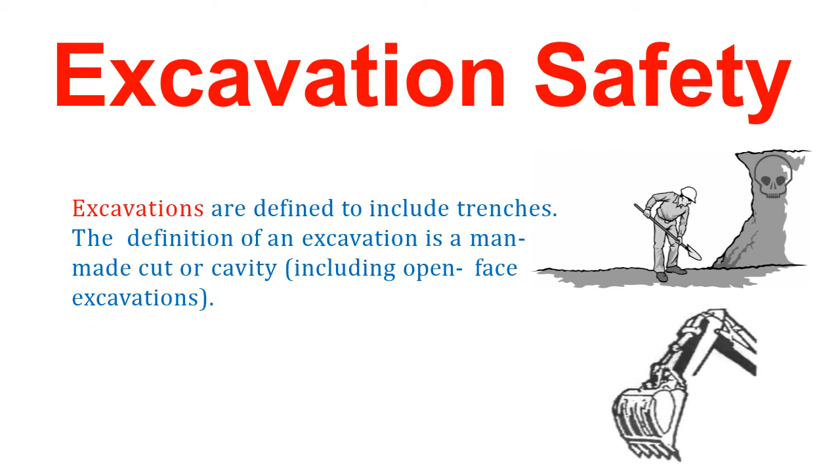Competent persons. Competent persons mean one who is capable of identifying existing and predictable hazards in the surroundings or working conditions which are unsanitary, hazardous, or dangerous to employees, and who has authorization to take the prompt corrective measures to eliminate them.

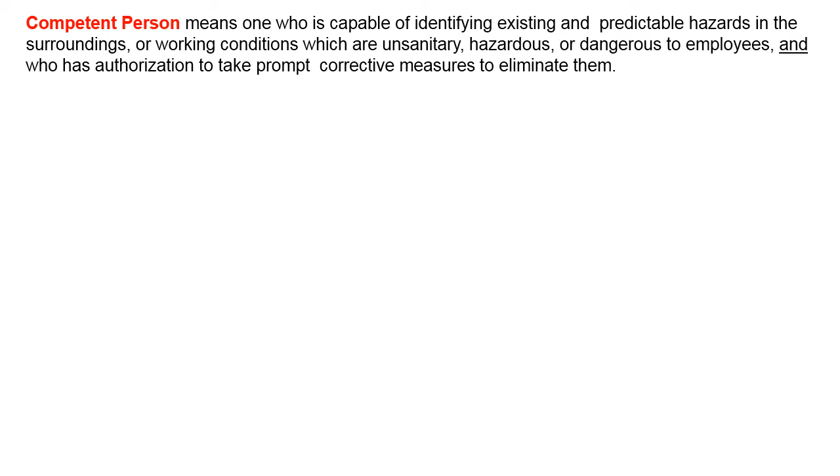Protective system means a method of protecting employees from cave-ins, from material that could fall or roll from an excavation face or into the excavation, or from the collapse of adjacent structures. Protective systems include the support system, sloping, benching system, shield system, and other systems that provide the necessary protection.

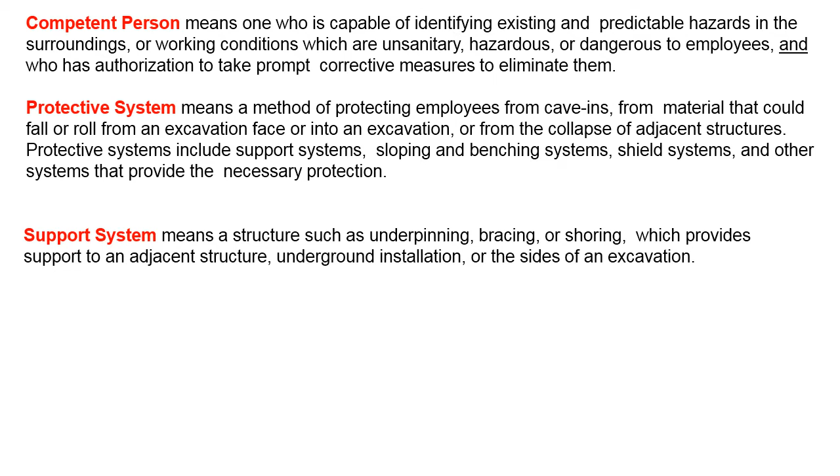Support system means a structure such as underpinning, bracing, or shoring which provides support to an adjacent structure, underground installation, or the sides of an excavation.

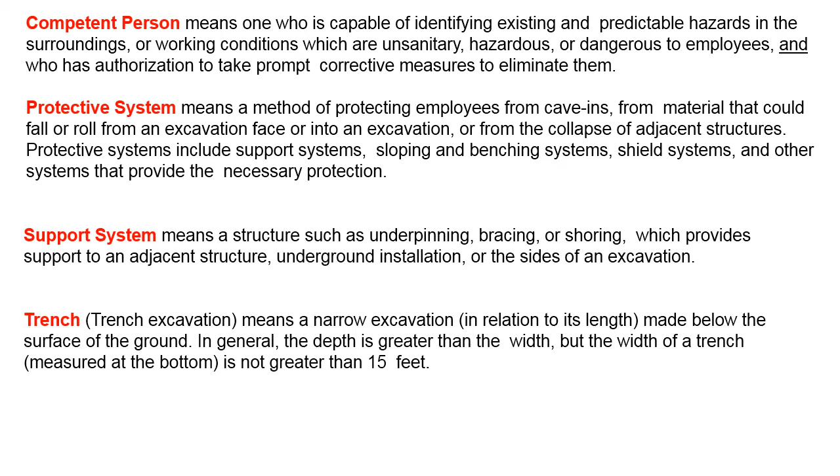Trench. Trench excavation means a narrow excavation in relation to its length made below the surface of the ground. In general, the depth is greater than the width, but the width of the trench measured at the bottom is not greater than 15 feet.

Excavation work is one of the most hazardous types of work done in the construction industry. Injuries from excavation work tend to be of a very serious nature and often result in fatalities. The concern in excavation related activities is a cave-in. Cave-ins are much more likely to be fatal to the employees involved than other construction related accidents. Furthermore, a high rate of injuries has continued to occur in and around excavations.

Although the concern in excavation related work is cave-ins, in this video we will also cover other dangers many do not often think of, including hazardous atmospheres, underground utilities, and vehicle/mobile equipment exposure.

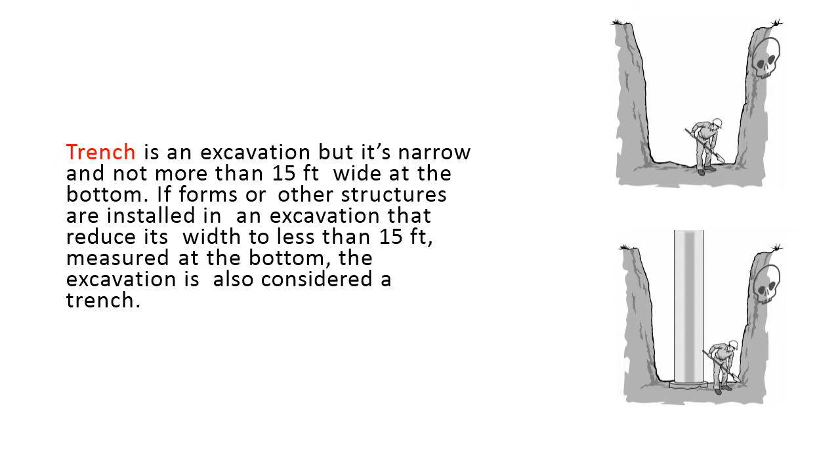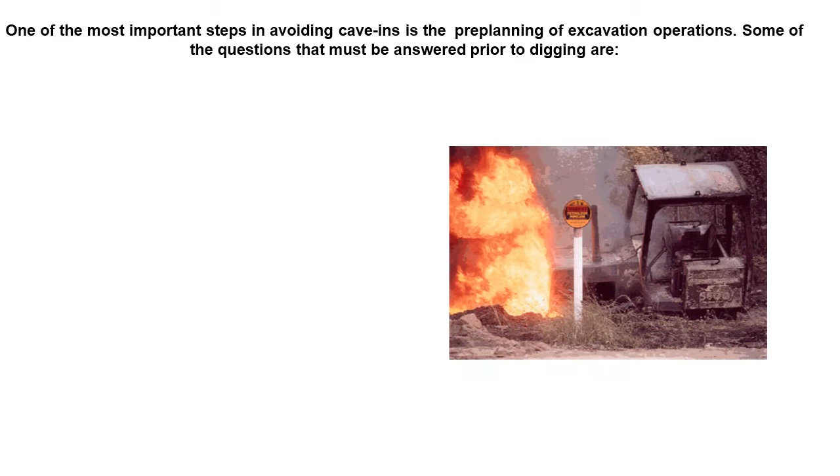One of the most important steps in avoiding cave-ins is the pre-planning of excavation operations. Some of the questions that must be answered prior to digging are: what types of soil will be found? What are the soil moisture conditions? Has the soil previously been disturbed? How large will the excavation be? How long will the excavation be open? What kinds of weather can we expect?

What kinds of equipment will be on the job? Will the excavation be near structures? Is traffic control needed near excavations? What source of vibration will be nearby? Will water be a problem? What kind of shoring, and how much?

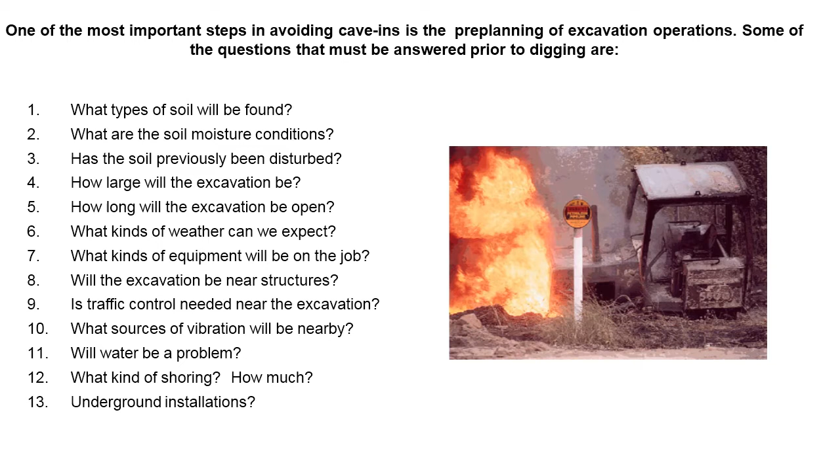Underground installations, if there are any underground installations, assess underground installations.

The picture is shown as an example. Determine the estimated location, contact the utility or owner, proceed cautiously, find the exact location, support, protect, or appropriately remove the installation in open excavations.

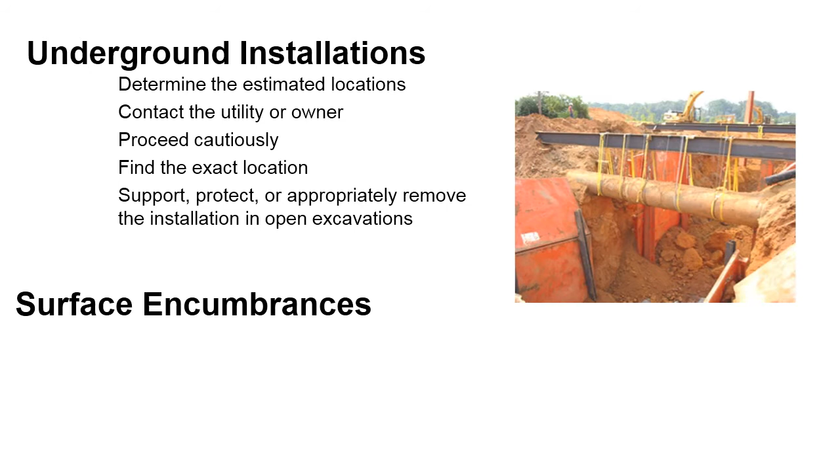Surface encumbrances: remove or support if creating a hazard to worker. What are some examples of surface encumbrances? Poles, rocks, trees. Next is access and egress.

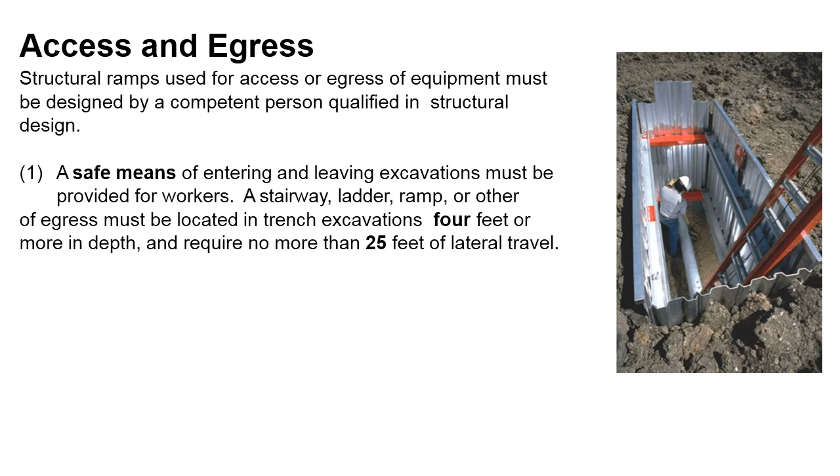Structural ramps used for access or egress of equipment must be designed by a competent person qualified in structural design. A safe means of entering and leaving excavation must be provided for workers. A stairway, ladder, ramp, or other means of egress must be located in trench excavations 4 feet or more in depth and require no more than 25 feet of lateral travel.

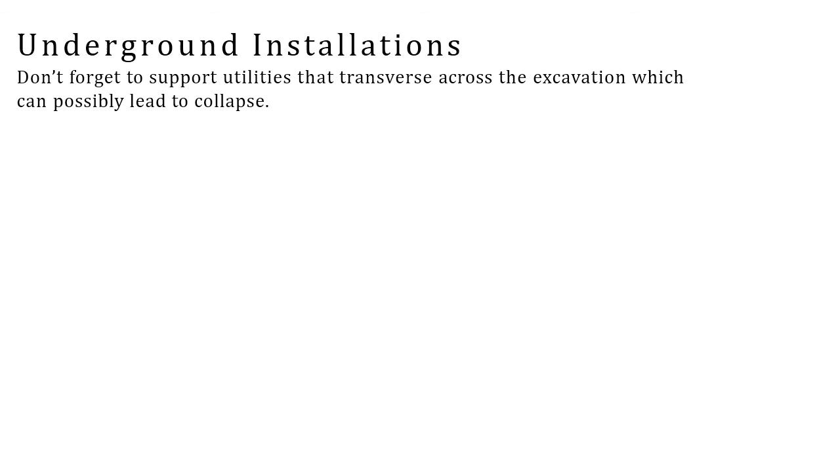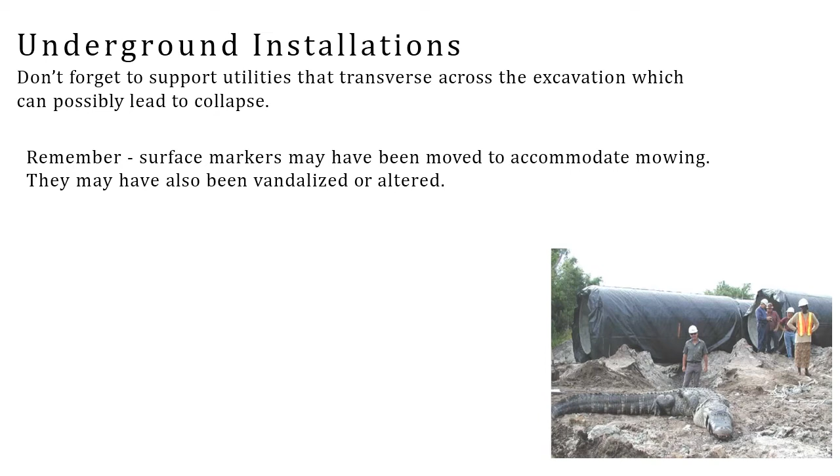Underground installations. Don't forget to support utilities that traverse across the excavations, which can possibly lead to collapse. Remember, surface markers may have been moved to accommodate mowing. They may have also been vandalized or altered.

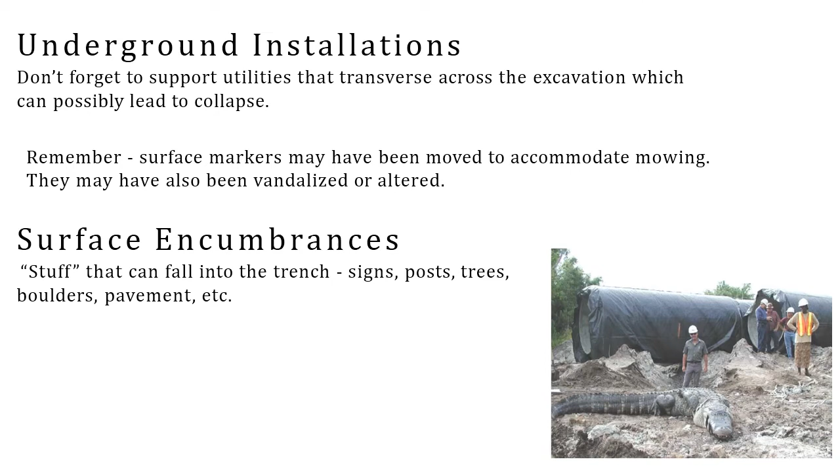Surface encumbrances: stuff that can fall into the trench, signs, posts, trees, boulders, pavements.

Access and egress. In addition to the 4-foot depth and 25 feet lateral requirements, don't forget safe means, for example ladders, stairways, etc., in good condition. No improper extension ladders, stable, no impalement hazards.

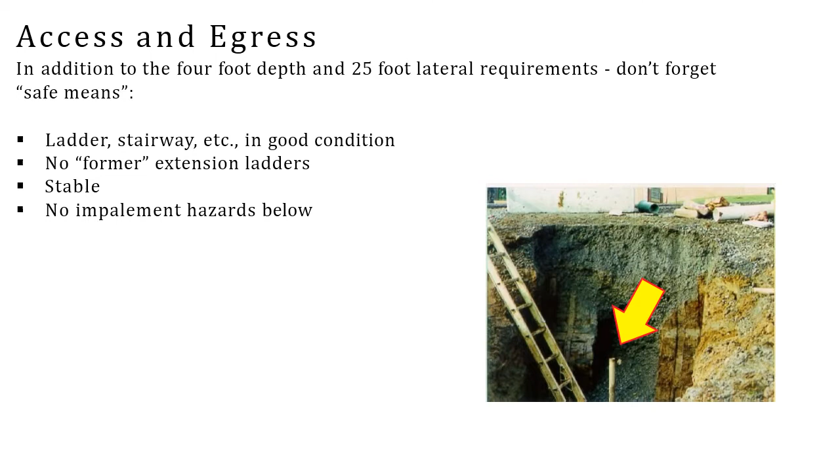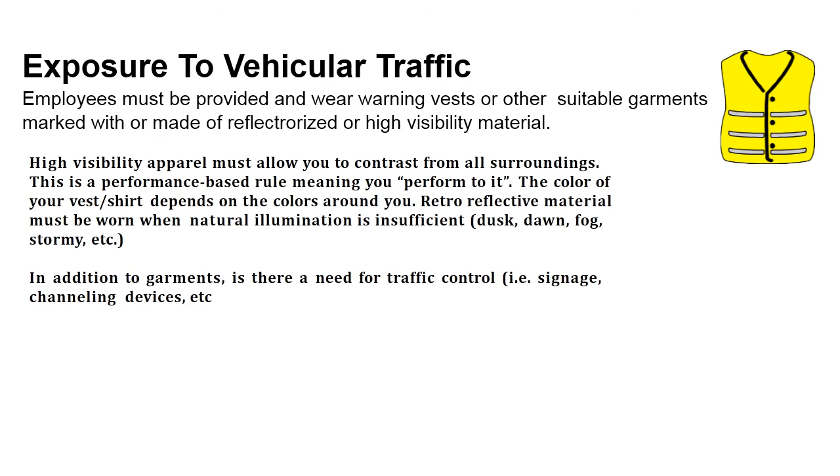In addition to the garments, is there a need for traffic control? For example, signage, channeling devices, etc.

Exposure to falling loads: employees are not allowed under loads handled by lifting or digging equipment. Workers must either stand away or otherwise be protected from any vehicle being loaded or unloaded to avoid spilling or falling materials.

Warning system for mobile equipment: a warning system must be utilized when mobile equipment is operated adjacent to an excavation or when such equipment is required to approach the edge of an excavation and the operator does not have a clear and direct view of the edge. Barricades, hand or mechanical signals, or stop logs can be used.

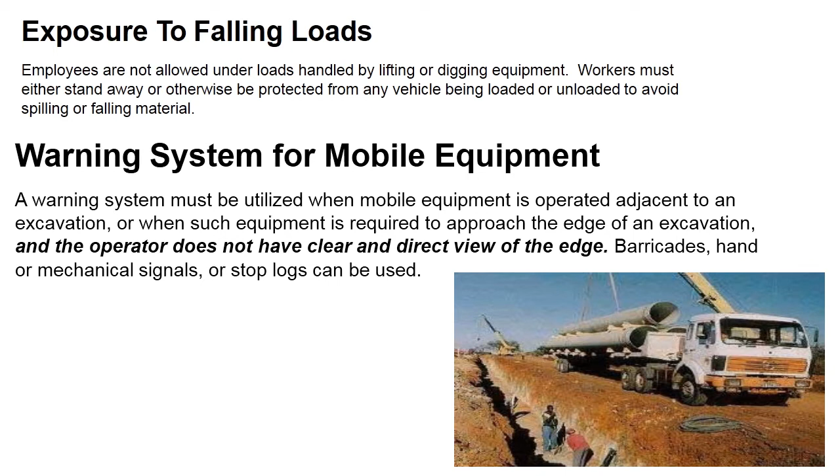Next is hazardous atmospheres. Purpose: prevent exposure to harmful levels of air contaminants such as oxygen deficiency, explosives, flammables, toxins, and to assure acceptable atmospheric conditions through atmospheric testing, removal of substance, proper ventilation, respiratory protection, etc.

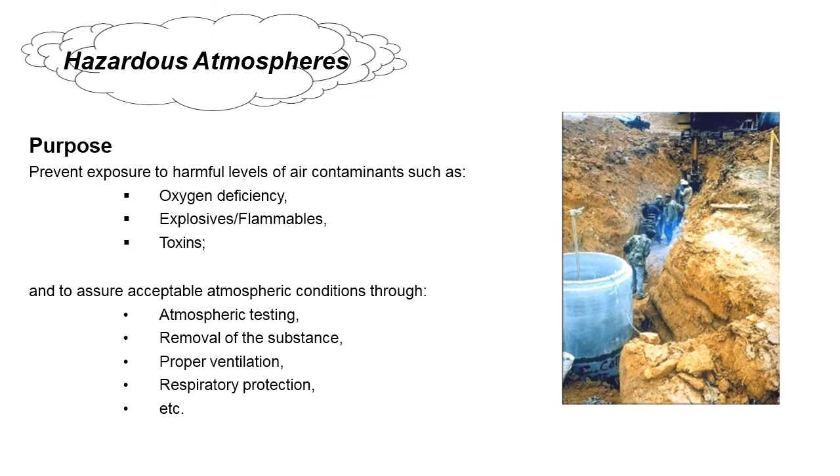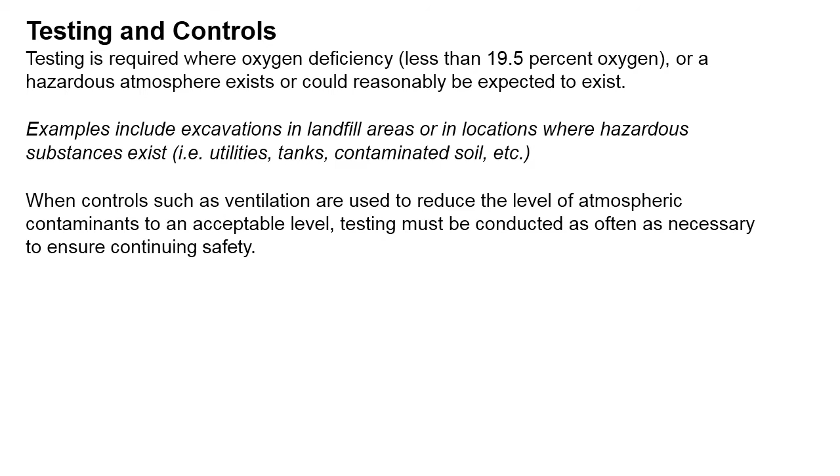Testing and controls: testing is required where oxygen deficiency less than 19.5% or hazardous atmosphere exists or could reasonably be expected to exist. Examples include excavation in landfill areas or in locations where hazardous substances exist, that is utilities, tanks, contaminated soil, etc. When controls such as ventilation are used to reduce the level of atmospheric contaminants to an acceptable level, testing must be conducted as often as necessary to ensure continuing safety.

Emergency rescue equipment must be readily available where hazardous atmosphere conditions exist or can reasonably be expected to develop. Note: Division 3, Subdivisions D and E provide additional requirements. Additionally, workers entering a bell-bottom pier or other similar deep and confined footing excavation must utilize a harness and lifeline system.

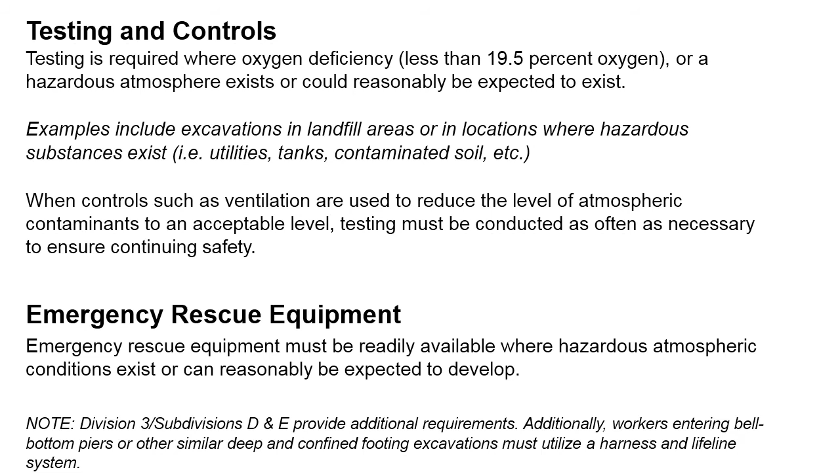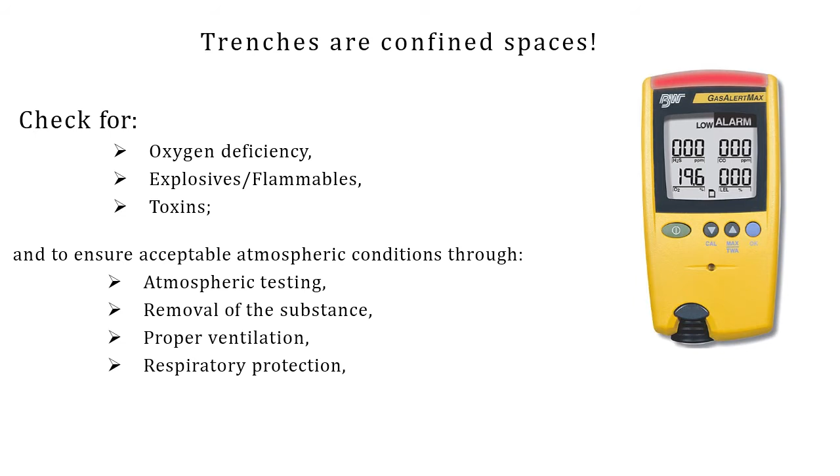Trenches are confined spaces: check for oxygen deficiency, explosives, flammables, toxins, and ensure acceptable atmospheric condition through atmospheric testing, removal of the substance, proper ventilation, respiratory protection.

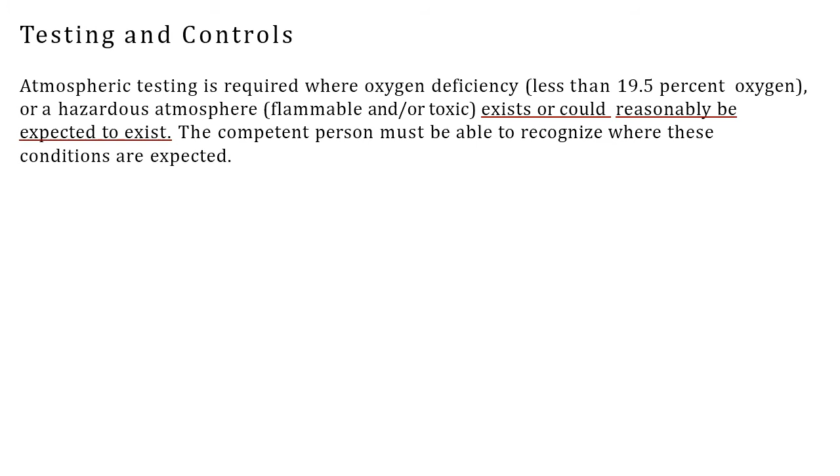Testing and controls: atmospheric testing is required where oxygen deficiency less than 19.5% or hazardous atmosphere, flammable or toxic, exists or could reasonably be expected to exist. The competent person must be able to recognize where these conditions are expected.

Some gases are heavier than air and can accumulate at the bottom of the trench. For example, hydrogen sulfide, carbon dioxide, and vapors from fuels are heavier than air. Other gases like methane and carbon monoxide are lighter than air. This is important to know when sampling.

There may also be oxygen deficient situations where purging with an inert gas has occurred, for example, decommissioned gas lines. Remember, sources may come from outside the trench and creep in, or come from inside the trench, that is, gas lines, contaminated soil, gas-powered tool equipment.

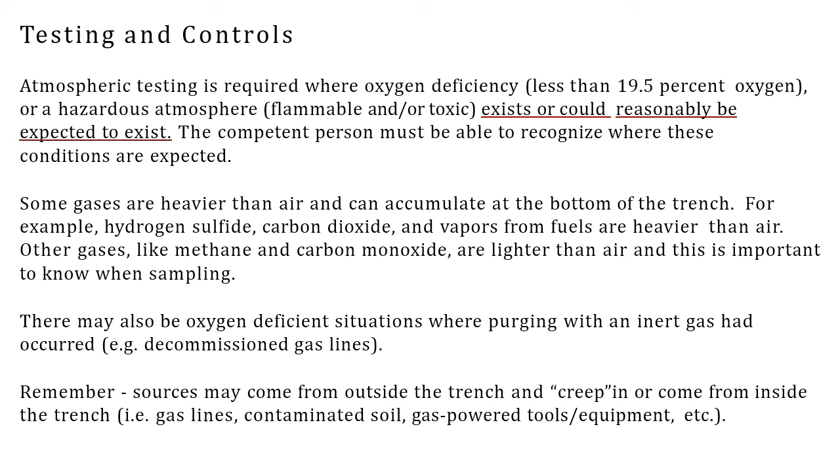Water accumulation: employees must be properly protected when working in excavations where water has accumulated or is accumulating. Precautions will vary with each situation but may include diversions, dewatering systems, special supporting systems, or water removal equipment. The competent person must monitor water removal equipment.

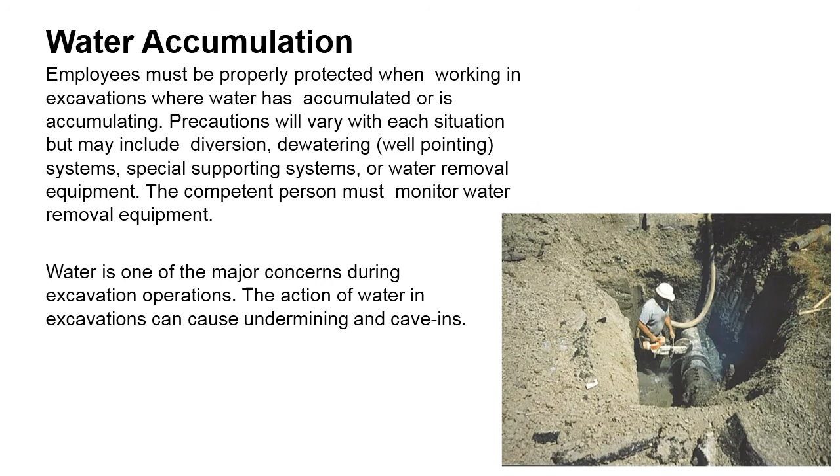Water is one of the major concerns during excavation operations. The action of water in excavations can cause undermining and cave-ins. Water accumulation is one of the major concerns during excavation operations. Water simply allows dirt to move much easier and quicker than it would normally. Think of digging in the sand on a beach.

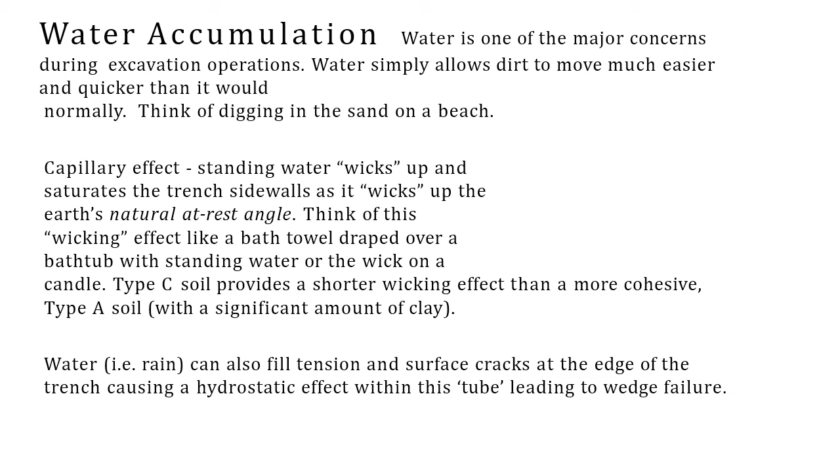Capillary effect: standing water wicks up and saturates the trench side walls as it wicks up the earth's natural at-rest angle. Think of this wicking effect like a bath towel draped over a bathtub with standing water, or the wick on a candle. Type C soil provides a shorter wicking effect than more cohesive type A soil with significant amounts of clay. We will show you examples of type C and type A soils.

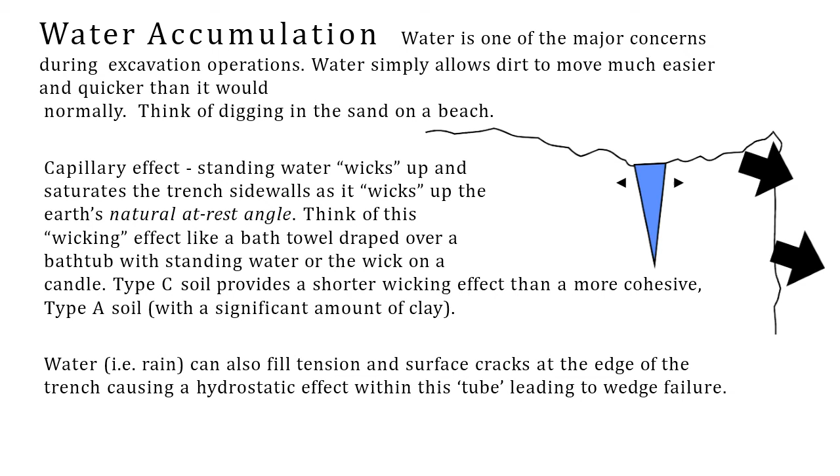Water, that is rain, can also fill tension and surface cracks at the edge of the trench, causing a hydrostatic effect within this tube, leading to wedge failure.

Where the stability of adjacent buildings, walls, or other structures is endangered by excavation operations, support systems such as shoring, bracing, or underpinning must be provided to ensure stability. Excavation below the level of the base or footing that could pose a hazard is not permitted, except when the excavation is in stable rock, or a support system is provided, or a registered professional engineer approves.

Sidewalks, pavements, and appurtenant structures must not be undermined unless a support system or another method of protection is provided to protect employees.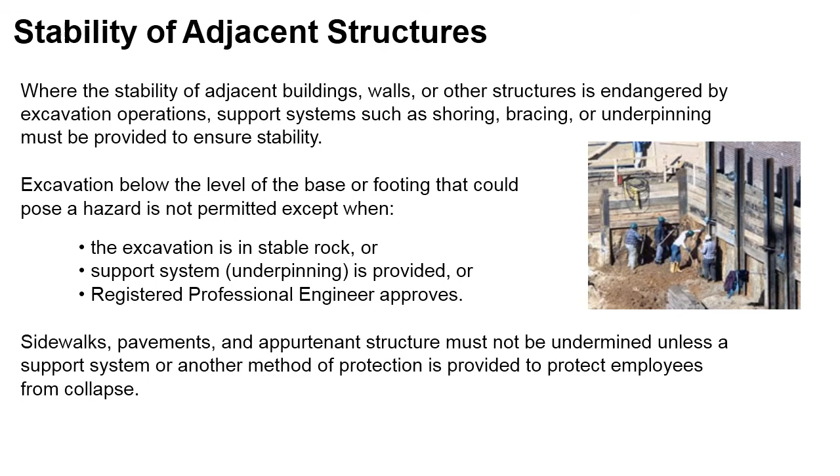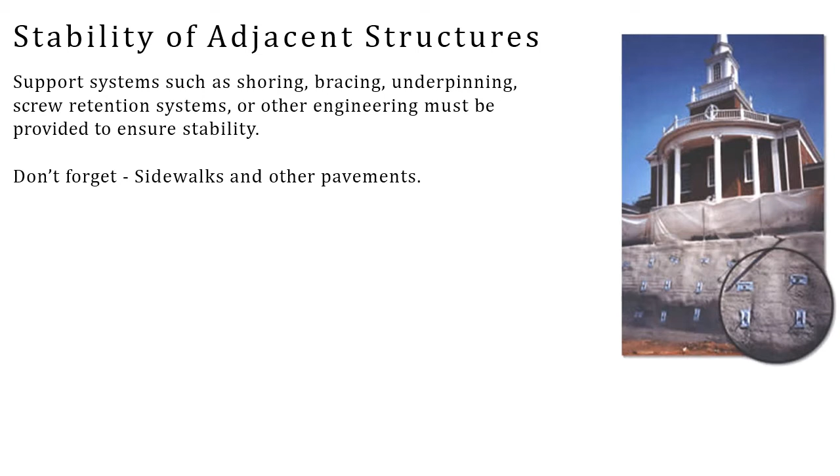Stability of adjacent structures: support systems such as shoring, bracing, underpinnings, retention systems, or other engineering must be provided to ensure stability. Don't forget sidewalks and other pavements.

Daily inspections of excavations, adjacent areas, and protective systems must be made by competent persons for evidence of a situation that could result in possible cave-ins, failure of protective systems, hazardous atmospheres, or other hazardous conditions.

What are we inspecting? If evidence of a possible cave-in, failure in the protective system, hazardous atmosphere, or other significant concerns are found, all affected workers must be removed from hazardous exposure until the area is rendered safe.

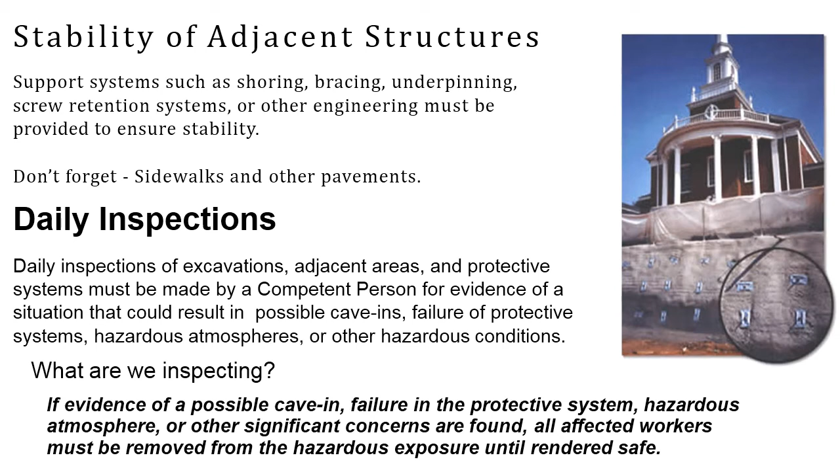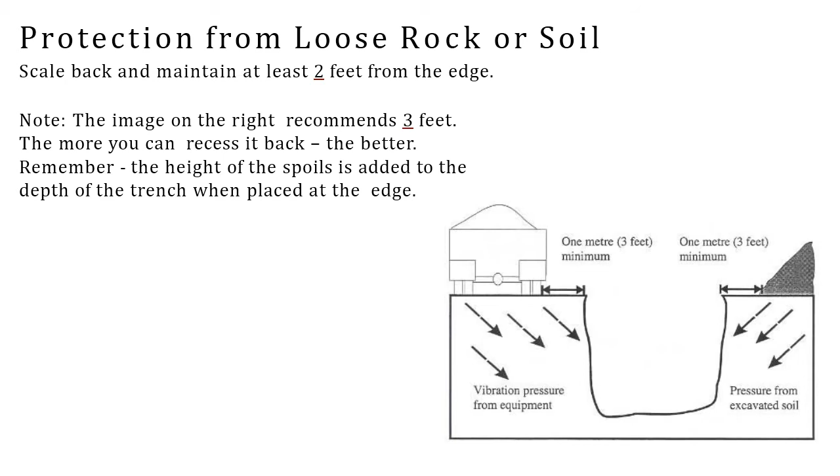Protection from loose rock or soil: scale back and maintain at least 2 feet from the edge. Note the image on the right recommends 3 feet. The more you can recess it back, the better. Remember, the height of the spoils is added to the depth of the trench when placed at the edge, as shown in the picture.

Protection from loose rocks or soil: scale back to remove loose materials or install protective barricades, and place all material and equipment at least 2 feet from the edge.

Fall protection: walkways must be provided when employees or equipment are permitted to cross excavations. Adequate barriers and physical protection must be provided at all remotely located excavations. All wells, pits, shafts, etc. must be barricaded or covered, and backfilled as soon as possible.

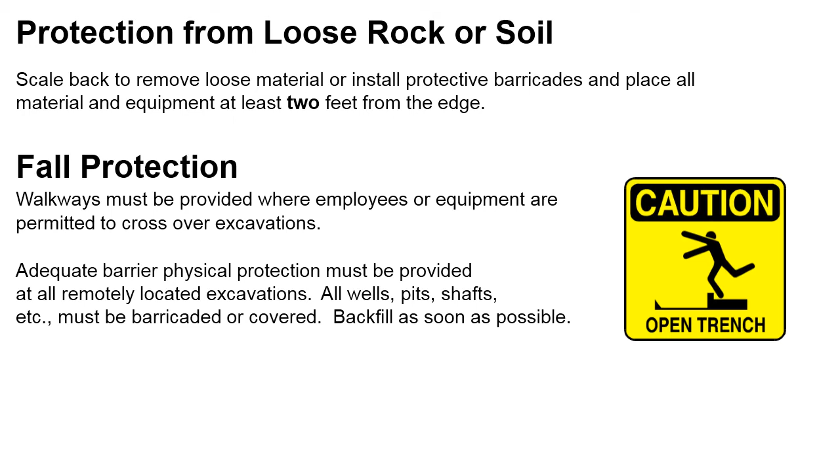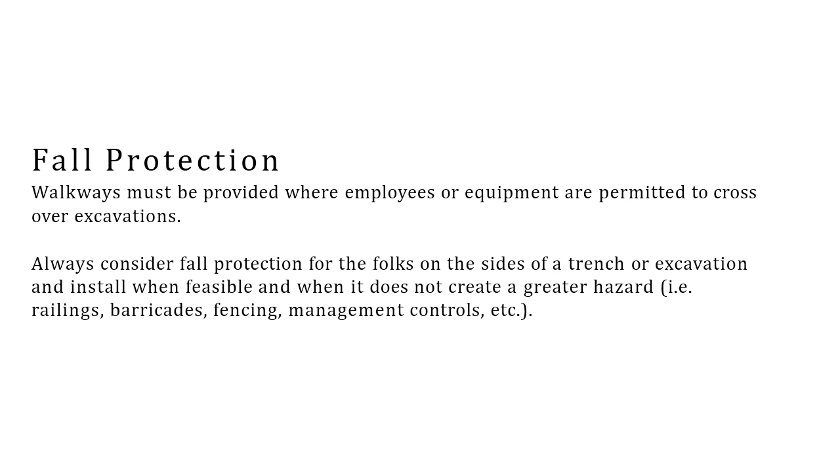Fall protection: walkways must be provided where employees or equipment are permitted to cross excavations. Always consider fall protection for folks on the side of the trench or excavation, and install it when feasible and when it does not create a greater hazard, such as railing, barricades, fencing, or management control.

Protective systems: employees in excavations must be protected from cave-ins by an adequate protective system, except when excavations are made entirely in stable rock or excavations are less than 5 feet deep and a competent person determines there is no indication of potential cave-in. The protective system must have the capacity to resist all loads without failure.

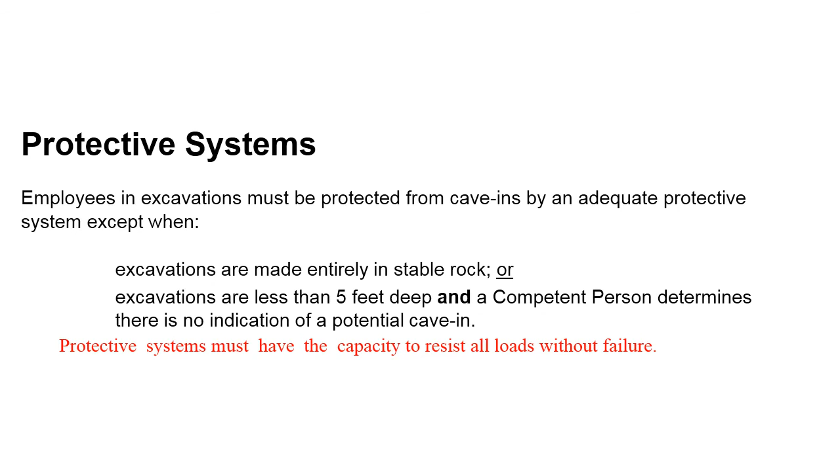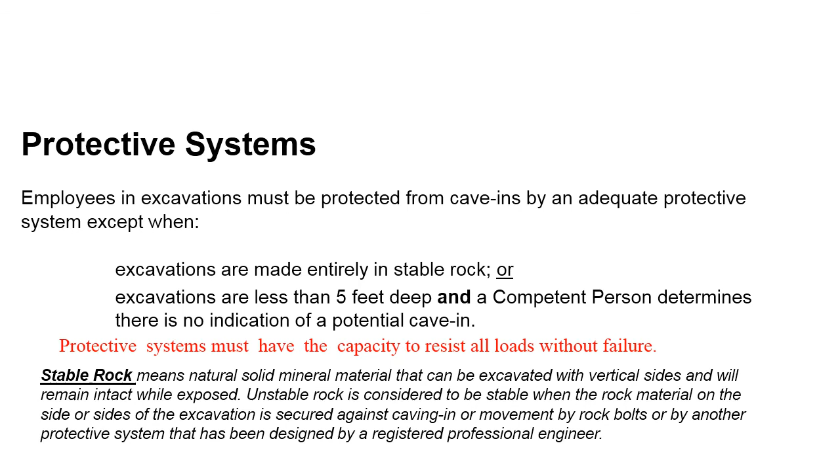Stable rock means natural solid mineral material that can be excavated with vertical sides and will remain intact while exposed. Unstable rock is considered stable when rock material on the sides of the excavation is secured against cave-in or movement by rock bolts or by another protective system designed by a registered professional engineer.

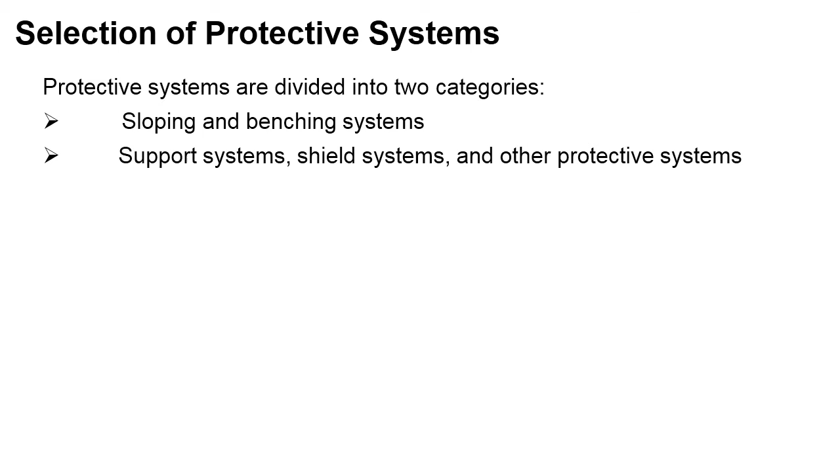Selection of protective system: protective systems are divided into two categories - sloping and benching systems, and support systems, shield systems, and other protective systems. The use of either category requires the choice of one of four design options.

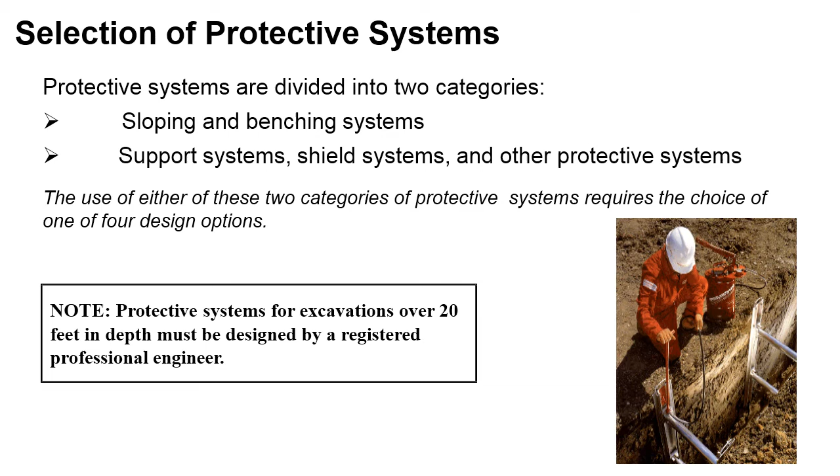Note: protective systems for excavations over 20 feet in depth must be designed by a professional engineer. Excavations and trenches less than 5 feet deep must still be sloped, benched, or otherwise supported when a competent person determines there is an indication of cave-in.

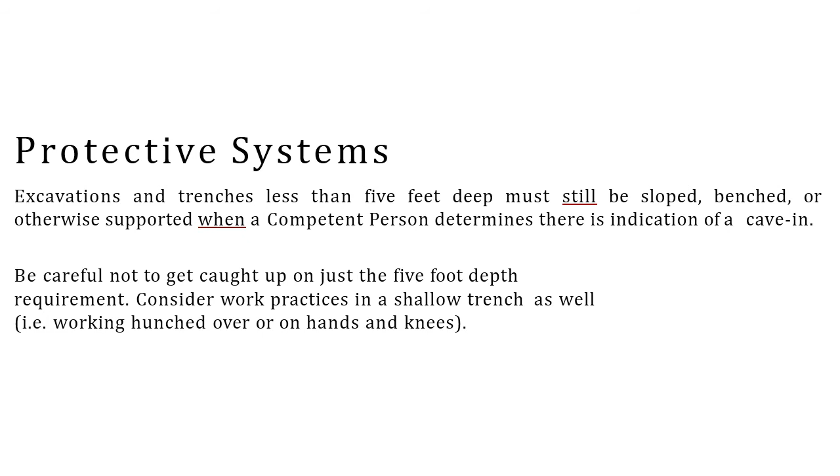Selection of protective system: protective systems are divided into two categories, each including four choices. One: sloping and benching systems. Second: everything else. The basic systems for protecting employees from cave-ins are sloping, benching, shoring, and shielding.

The system you should use depends on factors such as soil type and water content, excavation depth and width, the nature of the work, and nearby activities that could increase the risk of cave-in. The competent person is responsible for considering these factors and determining the appropriate protective system. A registered professional engineer must design protective systems for all excavations more than 20 feet deep.

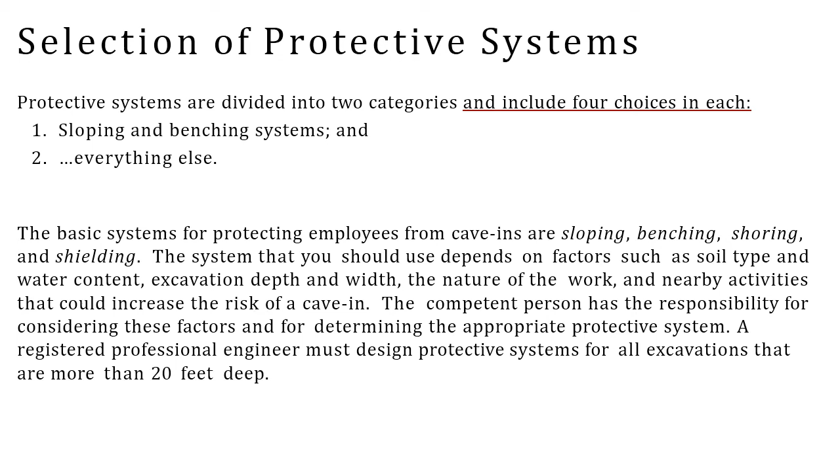Requirements for protective systems - sloping and benching options: the four options include sloped at no steeper than 1 1/2 to 1 ratio, or 34 degrees; maximum allowable slopes and configurations; and designs using tabulated data or designed by a registered professional engineer.

We have a few options here. Option number 1 allows excavation sloped at an angle no steeper than 1 1/2 to 1 ratio, or 34 degrees. This sloping option must be in accordance with the configurations shown for Type C soil in sloping and benching.

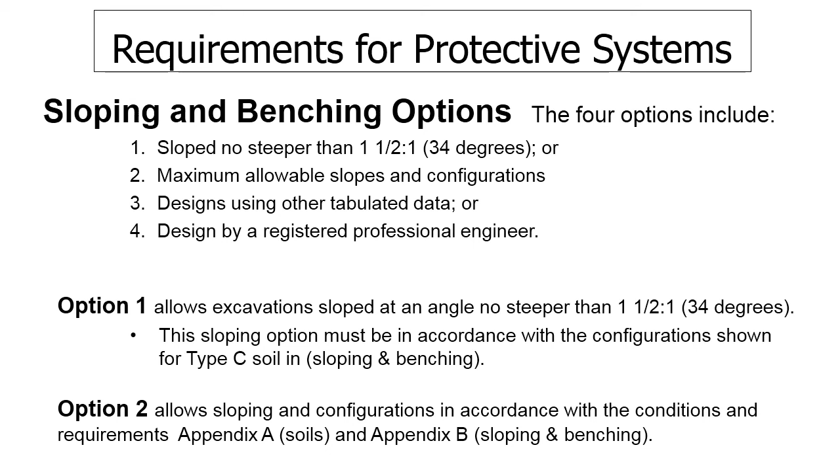Option 2 allows sloping and configurations in accordance with the conditions and requirements of Appendix A soil and Appendix B sloping and benching. We have different types of soils and maximum allowable slopes for excavation - this is just for reference.

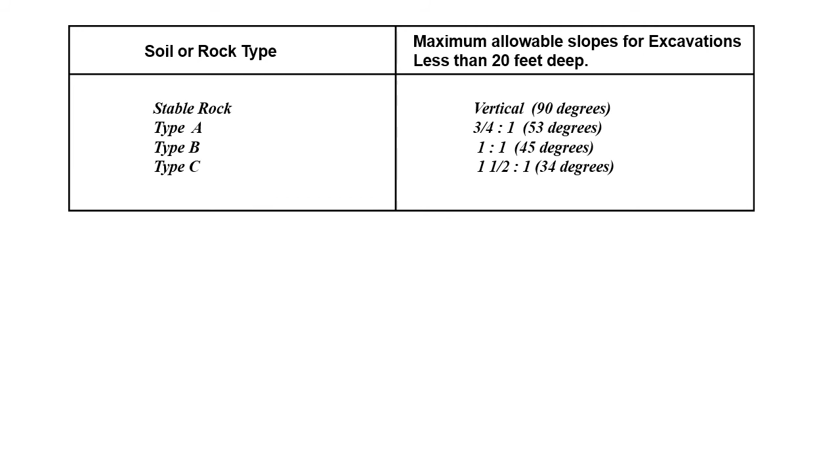Option number 3 allows designs of sloping and benching systems from tabulated data, which must identify the parameters affecting the selection of the slope or bench system, limitations, and any other necessary explanatory information to aid the user in selecting correctly. This must be kept on the job site during construction of the system.

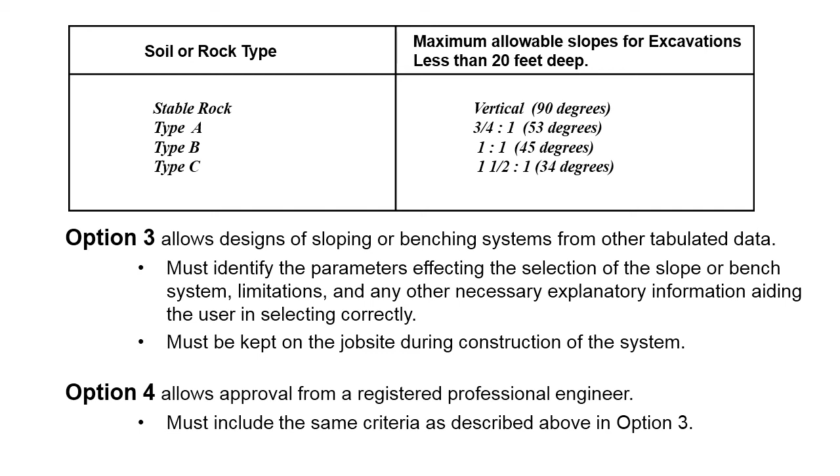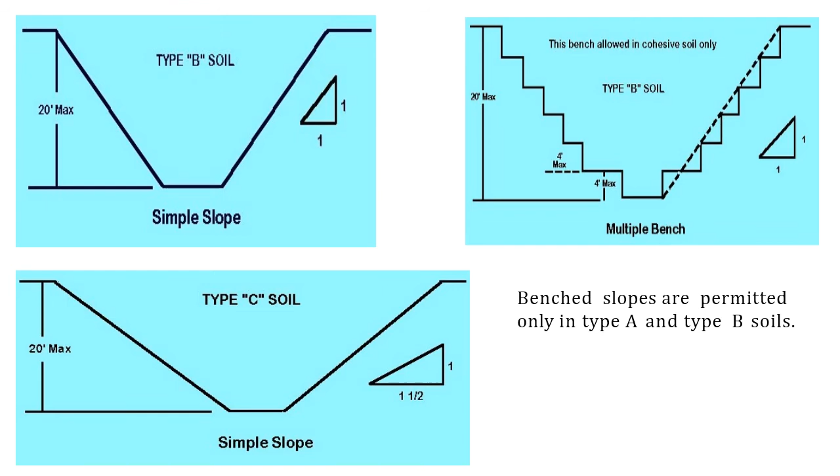Option number 2 allows the use of manufacturer's tabulated data. It must be in accordance with all manufacturer's specifications, recommendations, and limitations. Deviation can only be approved by the manufacturer. Data must be in writing and kept at the job site during construction of the protective system.

Option number 3 allows the use of other tabulated data. It must identify the parameters affecting the selections, limitations, and any other necessary explanatory information aiding the user in selecting correctly. It must be kept at the job site during construction of the protective system.

Option number 4 allows approval from a registered professional engineer. The design must be in writing and kept at the job site during construction of the system.

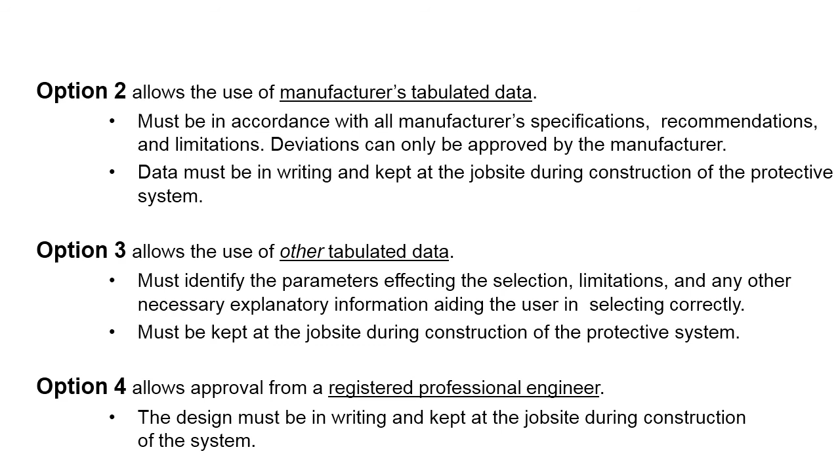Materials and equipment. Materials and equipment used for protective systems must be free from damage or defects that might impair their proper function. Manufactured materials and other equipment used for protective systems must be used and maintained in a manner consistent with manufacturer's specifications. A competent person shall examine damaged materials or equipment to evaluate its suitability for continued use, installation, and removal.

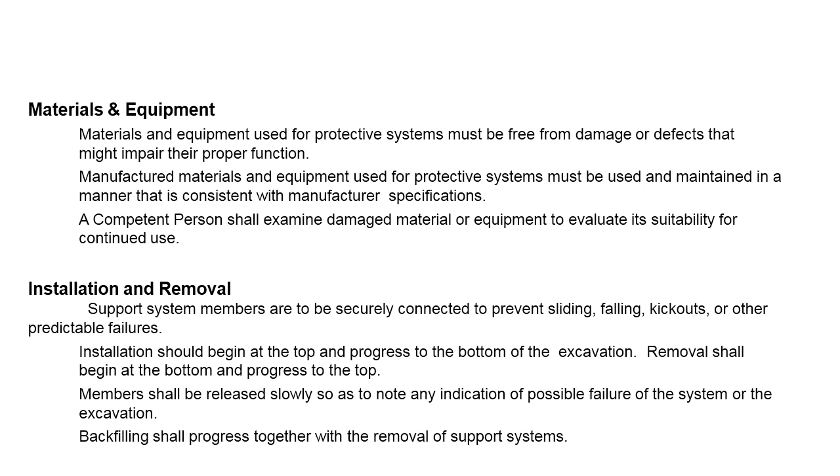Support system members are to be securely connected to prevent sliding, falling, kickouts, or other predictable failures. Installation should begin at the top and progress to the bottom of the excavation. Removal shall begin at the bottom and progress to the top. Members shall be released slowly so as to note any indication of possible failure of the system or the excavation. Backfilling shall progress together with removal of the support system.

Trench support. Materials may be dug to a level no more than 2 feet below the bottom of members of a support system, if the system is designed to resist the forces calculated to the full depth of the trench and there is no indication of soil loss from behind or below the bottom of the support system.

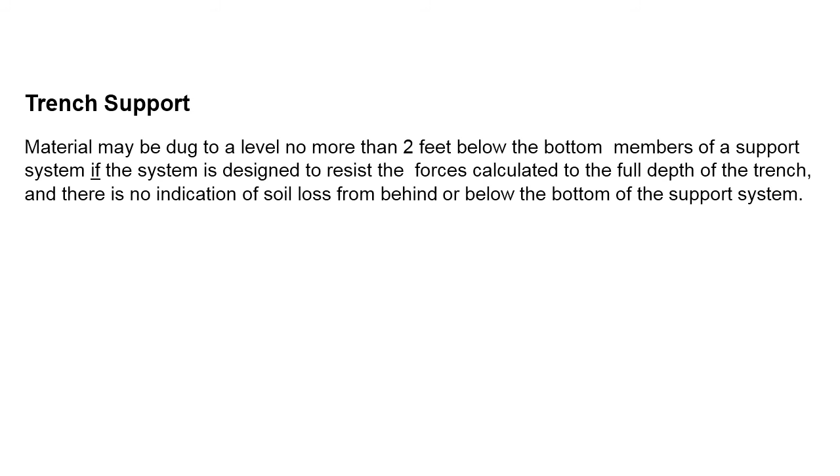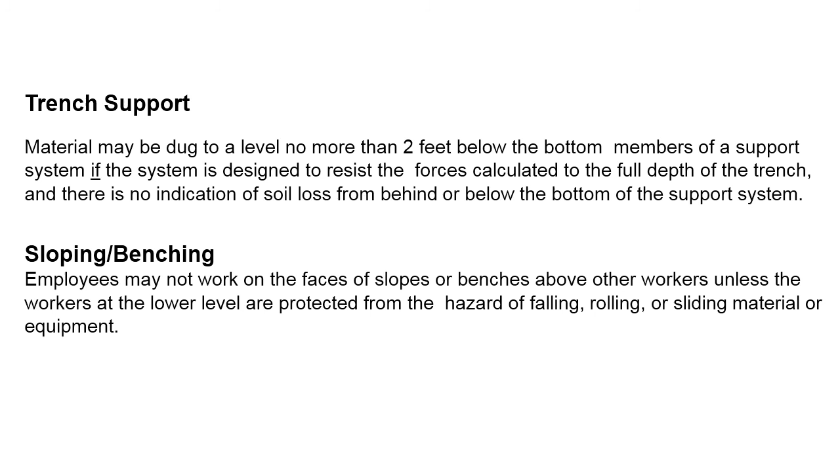Sloping and benching. Employees may not work on the faces of slopes and or benches above other workers unless the workers at the lower level are protected from the hazard of falling, rolling, and sliding materials or equipment.

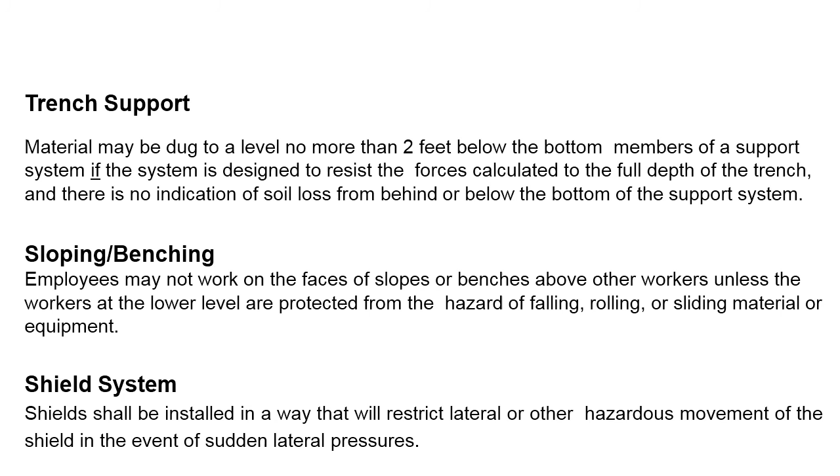Shield systems. Shields shall be installed in a way that will restrict lateral or other hazardous movements of the shield in the event of sudden lateral pressure.

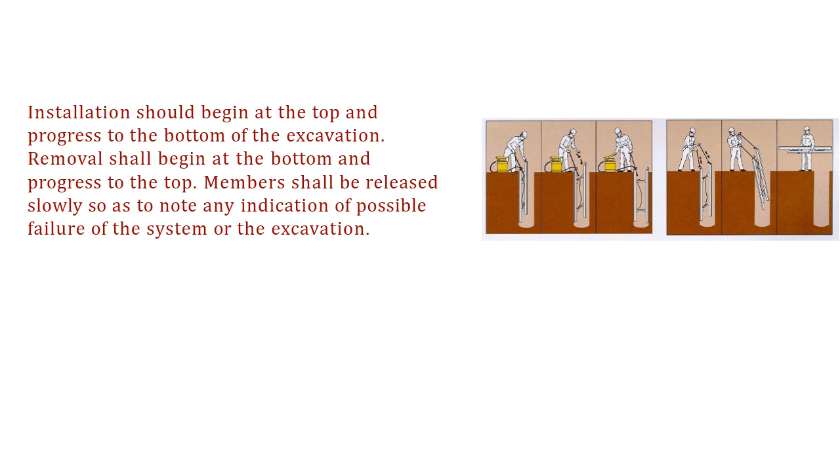Installation should begin at the top and progress to the bottom of the excavation. Removal shall begin at the bottom and progress to the top. Members shall be released slowly so as to note an indication of possible failure of the system or in the excavation.

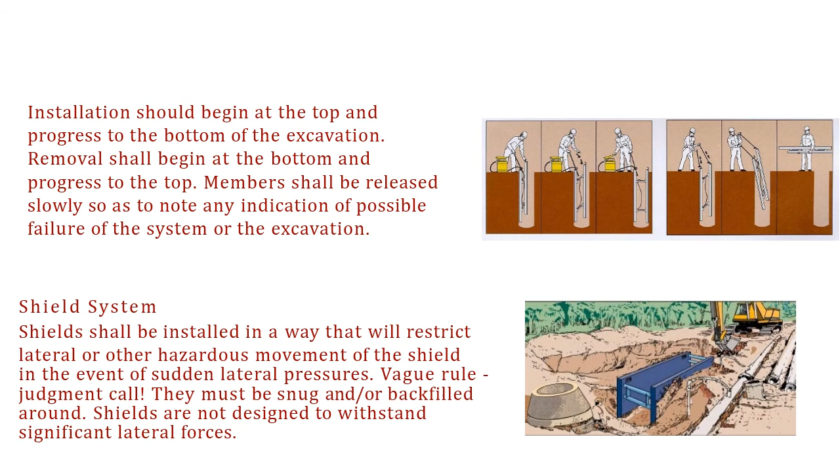Shield system. Shields shall be installed in a way that will restrict lateral or other hazardous movements of the shield. In the event of sudden lateral pressure, vague rule, a judgment call—they must be snug or backfilled around. Shields are not designed to withstand significant lateral forces.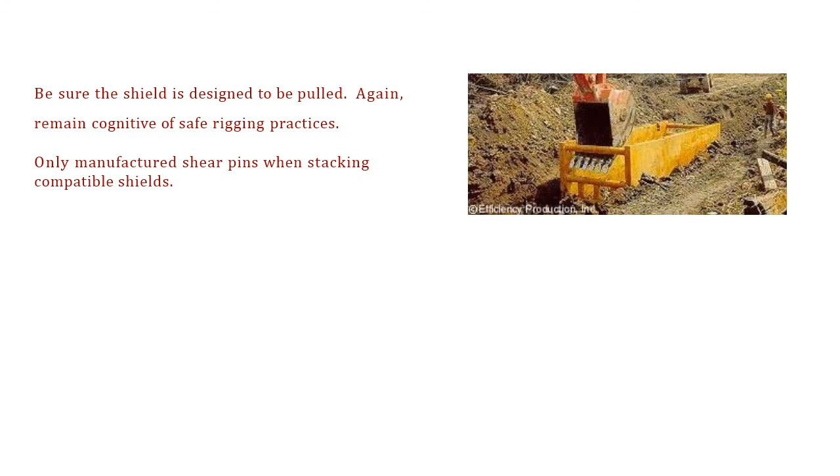Be sure the shield is designed to be pulled again. Remain cognitive of safe rigging practice. Only use manufacturer shear pins when stacking compatible shields.

Workers must be protected from hazards of cave-in when entering areas protected by shields. Workers must not be allowed in shields when shields are being installed, removed, or moved vertically.

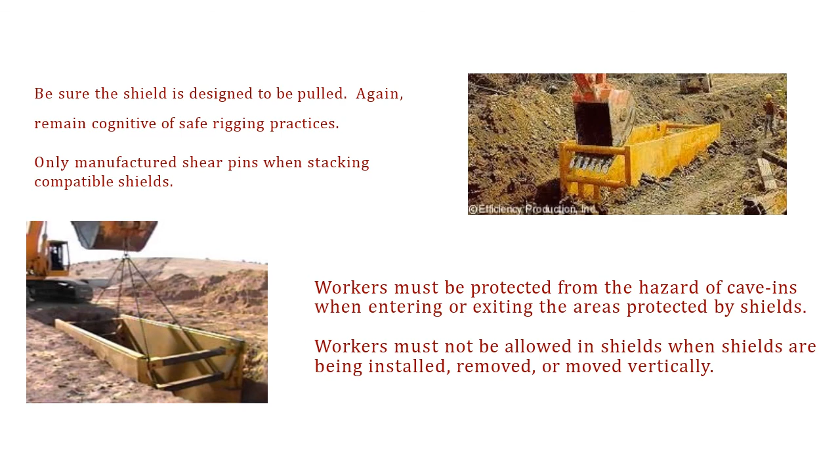Lateral horizontal pressure is approximately half of the downward vertical earth pressure. For example, 500 pounds of lateral pressure near the bottom of a 10-foot-deep cubic foot column. The area where most stress occurs is approximately two-thirds of the depth, and bulging will often begin here, compared to 1000 pounds of natural downward earth pressure.

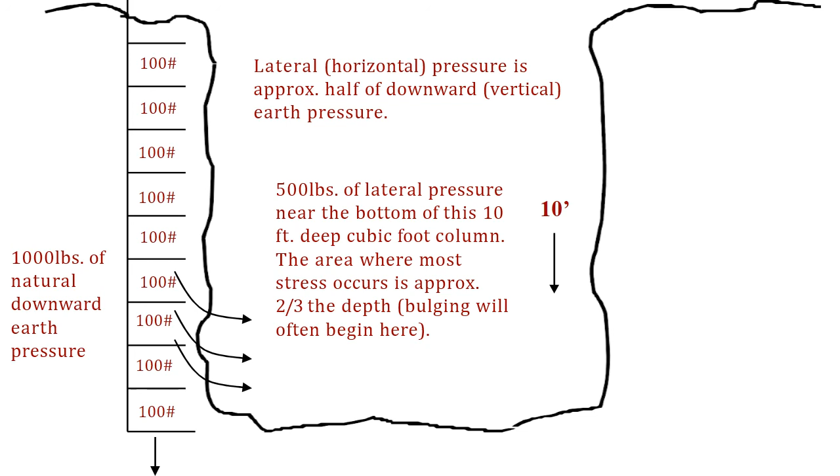Just like a cut on our arm, a cut made in the earth's surface will eventually heal. All trenches and excavations will eventually cave in—we just don't know when. Here is an example. How long trench walls stand depends primarily on soil type and weight, moisture, and organic material.

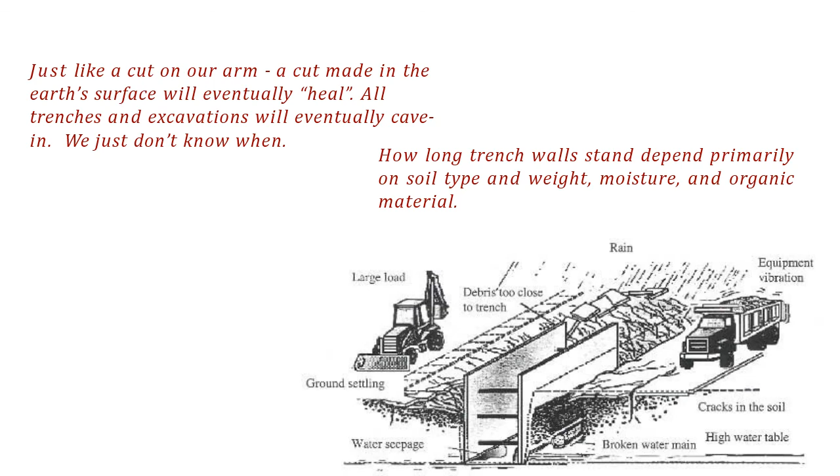There are already naturally occurring forces attempting to cave in the trench. In addition, other factors promote cave-in, such as superimposed loads at the edge of the trench, spoil pile, excavation equipment, fissures and tension cracks, vibrations, water, and previously disturbed soil.

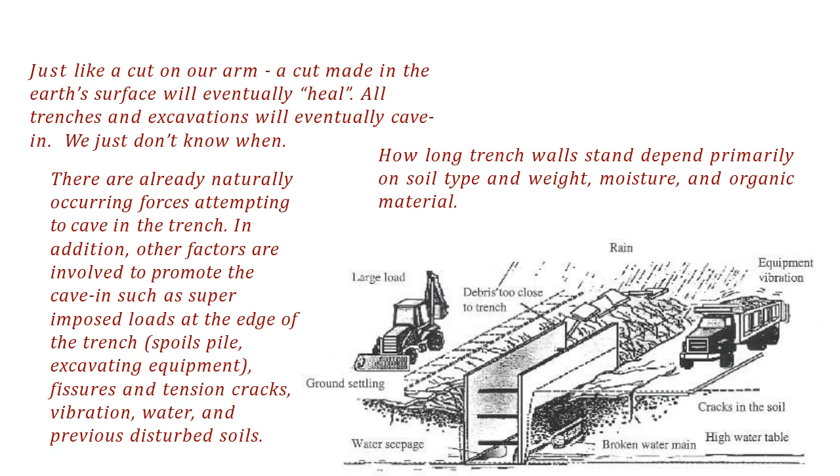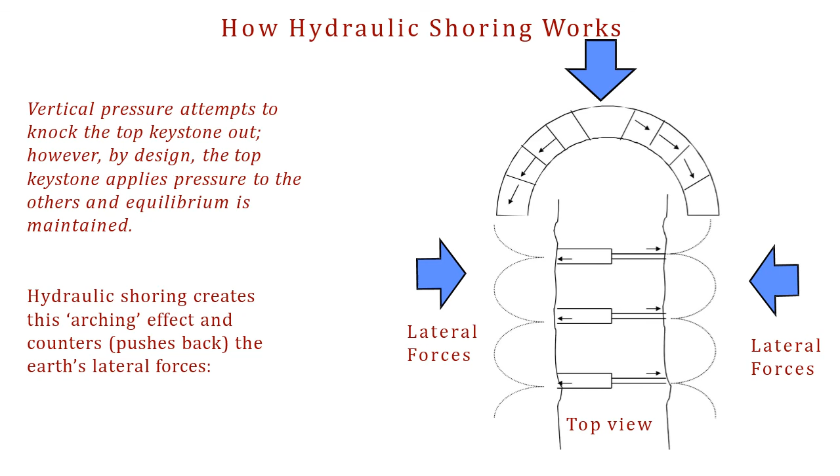How hydraulic shoring works. Here is an example, shown from a top view with lateral forces from both ends. Vertical pressure attempts to knock the top keystone out; however, by design, the top keystone applies pressure to the others and equilibrium is maintained. Hydraulic shoring creates the arching effect and counter-pushes back the earth's lateral forces.